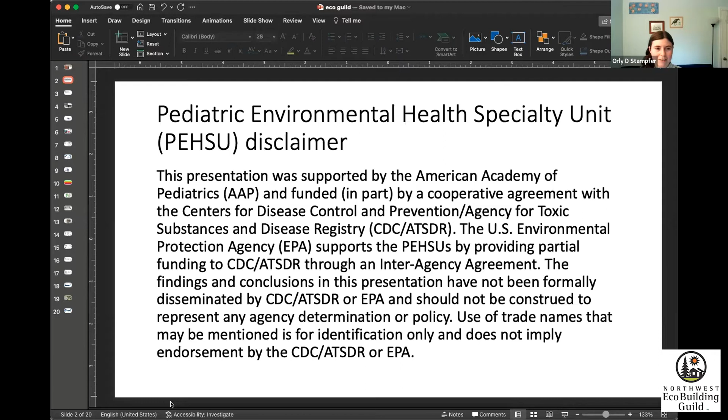And then at the end, I'll go into a couple of strategies for how to reduce exposure to wildfire smoke. Feel free to ask questions, clarifying questions throughout. And if I don't see a question, please feel free to just interrupt me too. That's fine.

Okay, so just start with this really broad overview of what is wildfire smoke. A lot of times we talk about it as if it's just this one thing, and as if wildfire smoke is all kind of the same. And it's actually really dynamic. So wildfire smoke is made up of particles, which themselves include liquids and solids, and then also gases. And it can change a lot as it travels over space, as the temperature changes and the wind changes, so the composition of the wildfire smoke changes a lot as it's traveling.

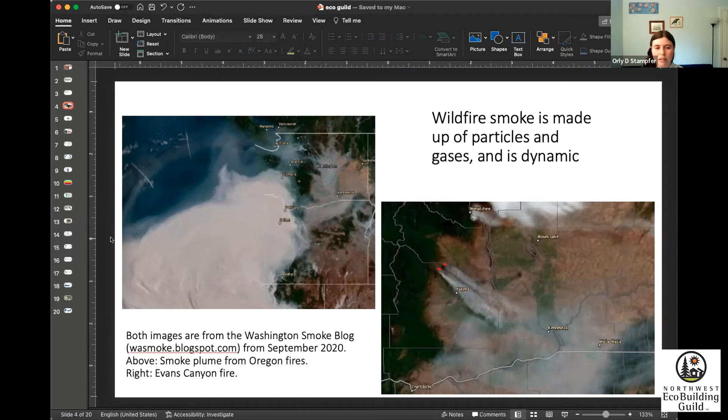So just to give you a sense that wildfire smoke is really dynamic and changes a lot, and that's part of what makes monitoring wildfire smoke challenging.

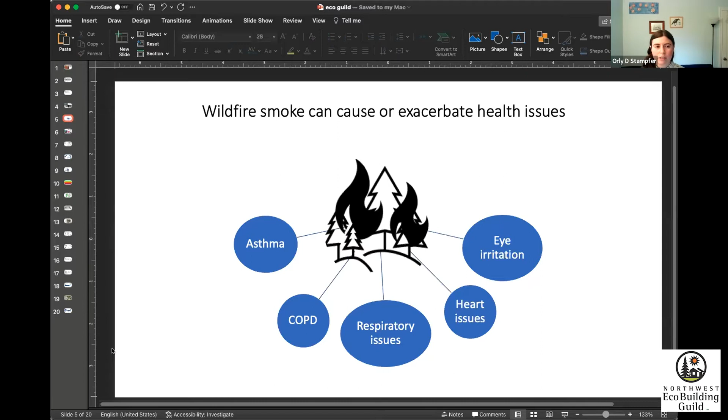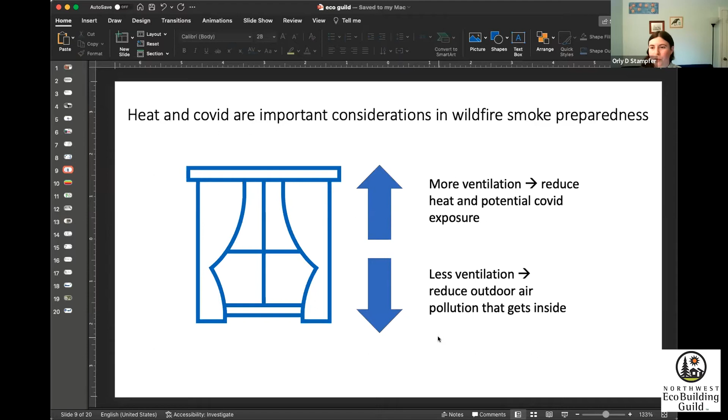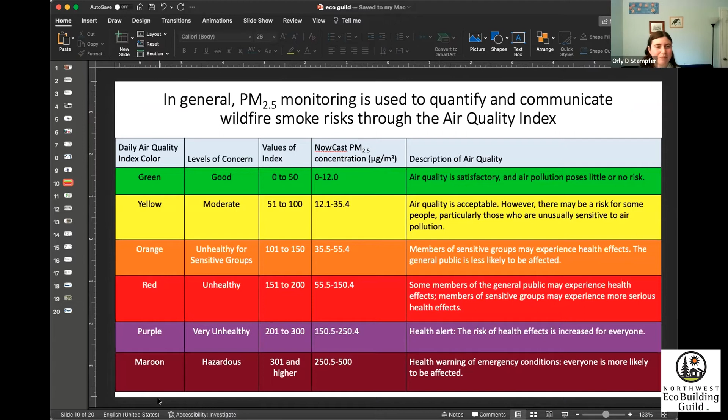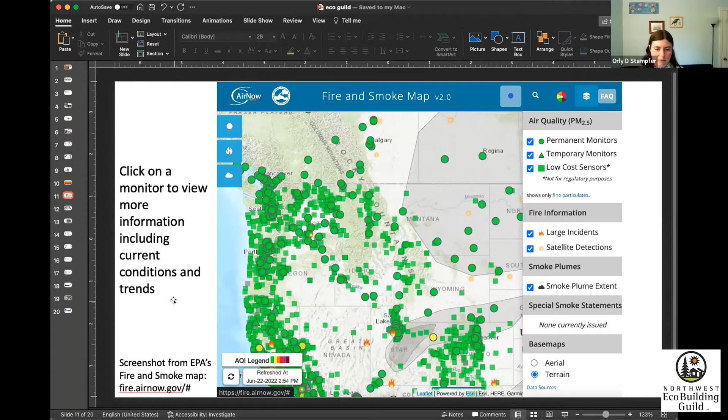And so they aren't sure about the credibility of the source. But this is actually really excellent information, compiled by state, county, federal agencies, and tribes as well. I know it's on Blogspot, and sometimes people are thrown off by that, but I think it's one of the best resources out there.

I look at the Washington Smoke blog regularly during wildfire smoke season, so I definitely recommend it. Oh, and I wanted to say too, each of these three smoke blogs already have that EPA fire and smoke map incorporated into the blog. So when you load these blogs, you'll already see the fire and smoke map right away, the same one I was showing you on the previous slide.

Okay, so all of that information I was just going through about how to look up your air quality, that's all referring to outdoor air quality. But like I was saying at the beginning, we also care a lot about indoor air quality. It's not necessarily a given that your indoor air quality will be good if you just go inside and close windows and doors. One thing I found is that your indoor air quality can actually vary a lot, even within the same building.

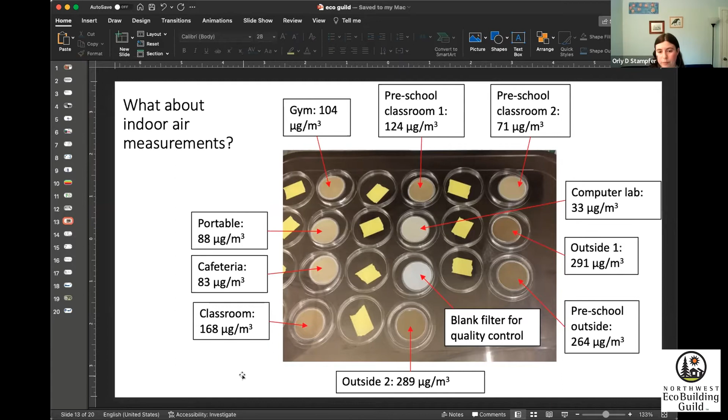So one way to take indoor air quality measurements is to use low-cost sensors. I wasn't going to talk about any specific brand in this presentation, but if you have questions about specific sensors, I will do my best to answer them if I've used that one.

My take-home message about low-cost sensors is that they can be useful to assess trends—to tell you if pollution is going up generally or down generally. And they can be useful to compare spaces to each other: is the air pollution in one room worse than in another room? Is air pollution indoors worse than outdoors, or vice versa?

But there are a lot of important considerations and limitations of low-cost sensors, so I'll just talk about a few here. One thing to think about if you're purchasing or using a low-cost sensor is how that data is going to be displayed.

Sometimes you can connect a sensor to the internet, or they'll have some kind of cloud-based service where you can view your air quality information that way. Other times it'll just have a little screen, where you walk around with a handheld sensor, and you're just reading the numbers off the screen in real time. Other times, you can download the data off of the sensor and create your own graphs and look at how the air pollution has changed over time.

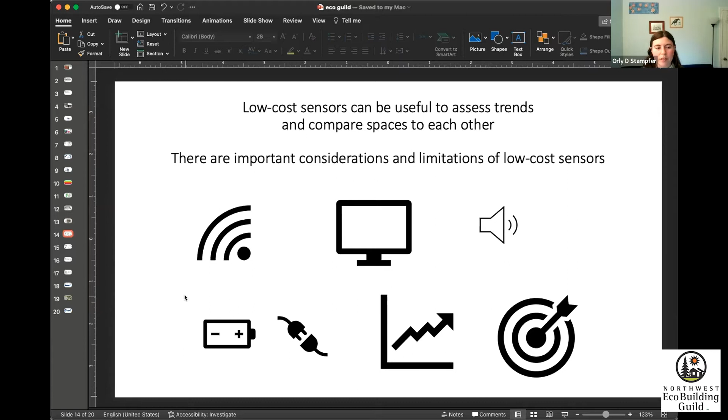So let's say now you have your low-cost sensor or multiple sensors, and you want to take some measurements to try and understand your indoor air quality better. These are some considerations to keep in mind.

When you're taking measurements, what you really care about is what people are being exposed to, what people are breathing in. So it's important to take measurements during regular use building conditions, because you want to capture what people are actually exposed to. For example, maybe you told everybody to keep the windows and doors closed, but they're still opening them. It'd still be really useful to find out what the air quality is like during that regular use condition, with folks opening windows and doors, because that reflects what they're actually breathing.

Also want to pay attention to the time. For example, if you're interested in a school, you might want to take measurements during pickup and drop off, because the front door is going to be open a lot during those times. And you also want to take measurements during the middle of the day that might represent the majority of the time that the school is in use.

It's also important to keep in mind what activities are going on in the space. Are people running around and kicking up a lot of dust, or is there cleaning going on that's impacting the indoor air quality, or is there cooking going on? You'll want to capture the range of conditions.

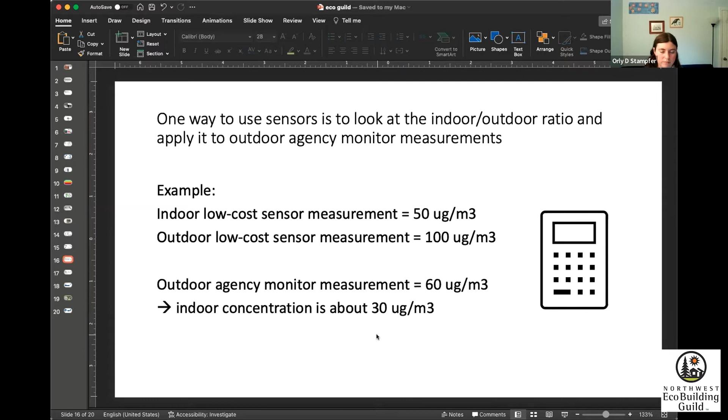Okay, so I also just wanted to go through not only how to look up your air quality and how to think about measuring indoor air quality with low-cost sensors, but also what can you actually do to maintain cleaner indoor air. So step one is to check the air quality so that you know when to take these actions.

Close the windows and doors. Turn off exhaust fans, because if it's a fan that exhausts to the outside, then while it's on, it's going to be drawing outdoor air into your home or facility.

If you have this option, set your ventilation system on recirculate, so it's not bringing in any outdoor air. This is also really useful in cars, to select the recirculate setting while you're driving. That can help reduce your exposure as well.

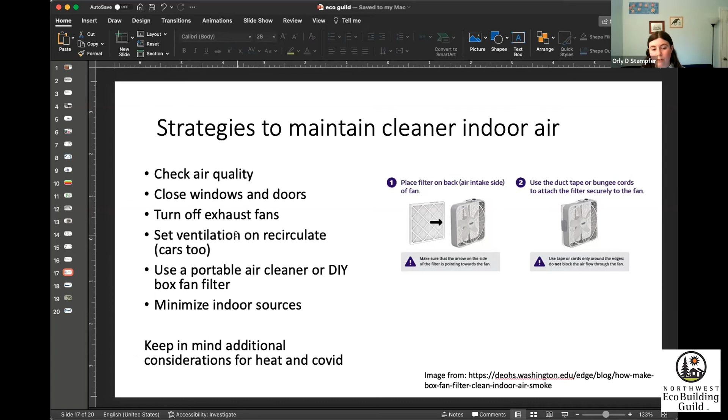I know I mentioned this already, but keep in mind additional considerations for heat and COVID, because that will impact how comfortable you feel having windows and doors closed, especially if you don't have air conditioning.

I did want to quickly mention a little bit more about portable air cleaners, and I think the next speaker is going to talk more about building level strategy. So this is obviously not a building level ventilation system strategy, it's just an individual supplemental strategy.

When you're looking up portable air cleaners, some things to pay attention to: if it has a CADR number, the clean air delivery rate, which gives you a sense of how much air that unit can filter per a certain amount of time. You'll also want to think about the size of the space where you're trying to filter air—if you got a small desktop air cleaner and you're trying to use that to filter an entire room, that's going to be really challenging.

Noise is a really important consideration. I've seen sometimes people have air cleaners, but then they don't use them because they're too noisy. Obviously it only helps if it's turned on, and if people aren't going to use it, then it's not going to help.

Some of them have an auto mode, so they actually have a sensor that's part of the air cleaner, and as the sensor detects higher concentrations of PM 2.5, it'll ramp up the fan speed and then ramp it back down automatically. That can be nice to have. A sleep setting is important to think about if you're going to put this in a bedroom, especially a feature of being able to turn off the display light.

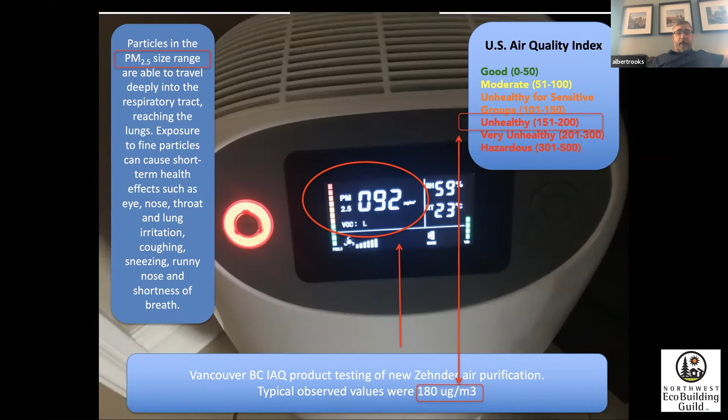This building didn't have a ventilation system, but we experienced it. My wife and I have had headaches and eye irritation and all of these things. We really couldn't find a way other than this device to get any relief from it, and it's really kind of an ongoing problem.

So not really telling anything new to anyone, but let's just take a step back. When we look at continuous ventilation in buildings right now, the newer buildings have some kind of well-performing ventilation device. We typically work with these Zehnder units, so that's my experience, and that's what I can really talk about.

A standard unit comes with an onboard MERV 13 filter. When we look up the literature for particle size, it's 1 to 0.3, which is a good size. This is now code in California. I think this might be code or approaching code in Washington State for commercial ventilation strategies, so this is pretty good.

I'm also interested in people's experience, so during this particular late summer I got a chance to talk to a number of customers that have systems installed. All of them generally would have a MERV 13 on the supply filter coming into the building. Some of them did just fine, reporting that their experience was fine—they safely made it through these large smoke events—while others said the MERV 13 filter wasn't good enough at all. They had a lot of smoke coming in, and it really irritated them and caused some problems.

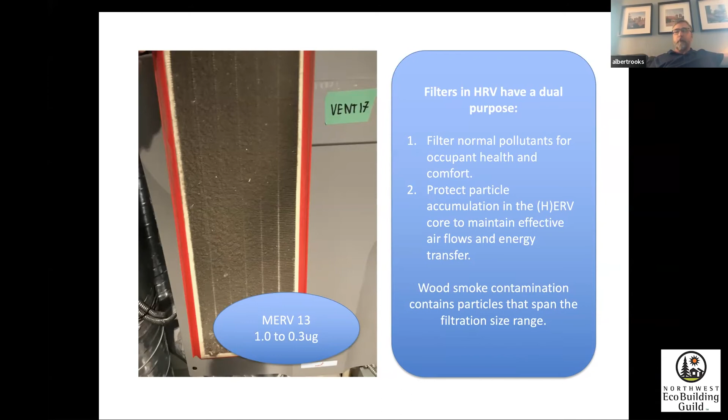My personal experience is I've had a lot of different filters to work with and systems to plug them into, and I can look at data because I have the ability to use low-cost sensors, and I can also just use my body to check my experience. Generally what I've found is the MERV 13 filters haven't really been enough for me, and generally for most people. When I've put in a MERV 15 filter, which is much finer—and we've got a MERV rate chart, I think, in the next slide—that's really helped.

It was really great of Orly to define that difference between a particle and a gas, because that black filter in the picture right behind is an activated carbon filter. In one of the smoke events it was really interesting—in 2018 in Washington, I think we had a week where we had some really fresh, new low smoke.

And so the sun was darkened because of the particles, but also kind of hanging low in the atmosphere at our breathing level was really a lot of gas, or it sure seemed like it was a gas. I did a small experiment putting an activated carbon filter in a building we'll see in a couple of slides, and that really, really helped a lot.

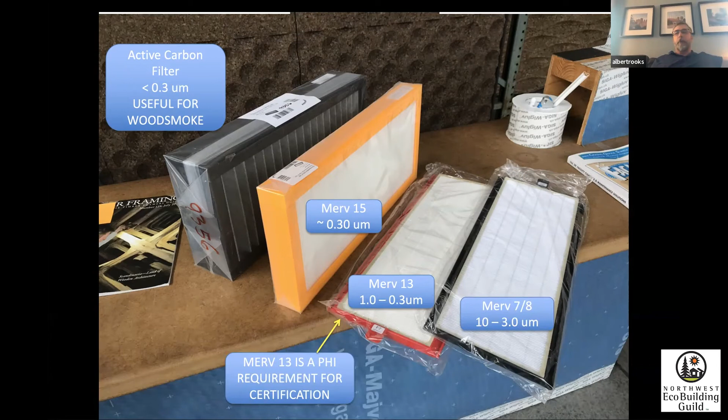Yet I think you can buy some activated carbon at Home Depot to make an adaptation of the Corsi box fan. So it might be worth knowing that, because at different times we're trying to filter out different particles or gases.

So here's a MERV filter efficiency guide, an ASHRAE guidance, and I find it a very imperfect document. It kind of gives us some room or some levels that the filtration is operating in. California code right now is MERV 13 on a supply intake. So we see this kind of 12 to 14 range, and it has a pretty good arrestance level. It talks about the type of filter it is and really what it's capturing, then heading down to 14 and 15 approaches HEPA.

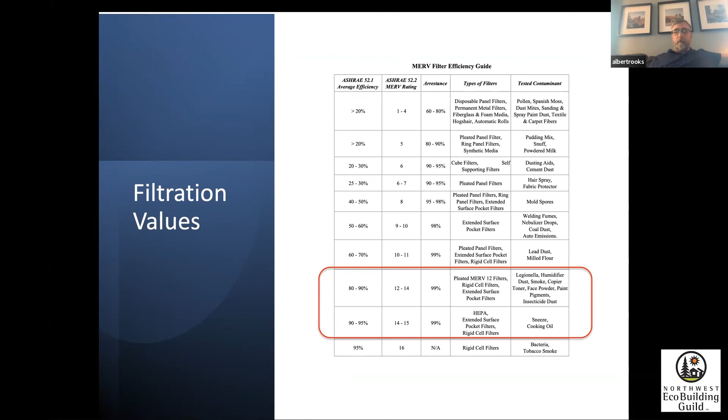It suggests HEPA looks like some pretty small particles, and maybe almost the gas at that level. As we head into 16, smokes and bacteria are kind of more gaseous than particles. So the thing I take away from this is, depending on the sensitivity and what we think the future is like, a finer filtration is better. And in some cases, MERV 13 is just a heck of a lot better than anything else.

Another experience I had, we did a retrofit on this house here. We put in a ventilation system, a continuous fresh air ventilation system. I'd say the continuous flow to this house, which is about 1,100 square feet over 2 floors, is about 70 cubic feet per minute, so steady. Ventilation rate, yeah, there it is down there, 0.32 air changes an hour. So that's a pretty steady rate, good values there.

The thing that happened with this house is it's in a collection of older homes in Olympia, and some of these really old homes had very old wood burning stoves. So winter would come, people get excited about burning their wood stoves around October, November, December. It seems like there's a lot of burning. We get an inversion, and all that wood smoke is kind of hanging out low to the ground.

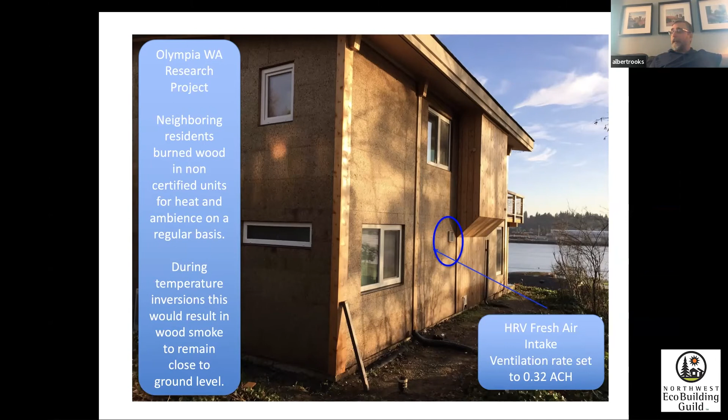And here we have this device that's pulling in air and running it through heat recovery with mild MERV 13 filtration. This wood smoke is really nasty, and it's got a lot of gas in it. So MERV 13 didn't really do anything for the gas as near as I could tell.

So we actually had to retrofit it and take that left-hand arrow apart, which is the supply flow, pick it up, turn it around, re-duct it, and add that steel box now on the right-hand side of the picture. That steel box, with the 2 screws in the upper corners at the lower where the tubes are connecting, is actually a door. You open that door and you can slide in an activated carbon filter or a MERV 14 filter.

We slid in an activated carbon filter and then ran the device at normal ventilation rates. The smoke cleared, the inside felt great. This particular structure has a really good air barrier - we retrofitted it down to 1.5 air changes. So there's really no other source of air coming into that building other than the ventilation device, and the filtration in this case worked well.

However, when we're working with activated carbon, the smell goes away and a lot of the irritation goes away. If there's any fine particles in there, I don't know that the activated carbon is really equipped to filter out those fine particles. So I can't really attest to how well I'm taking the particles out, but the irritation does go away.

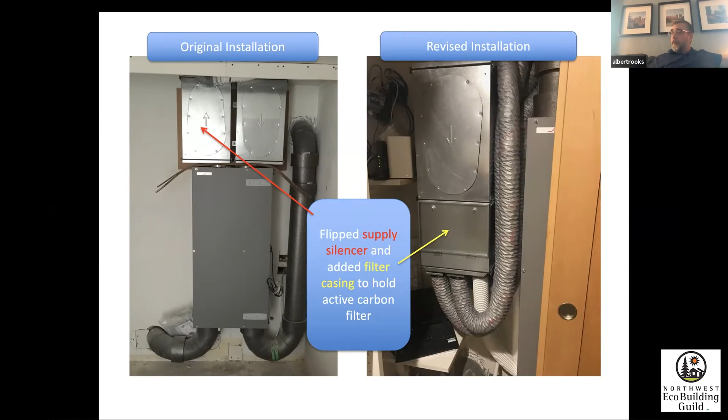This building here is one of our warehouses in Tumwater, Washington. I think this was 2018, and then also a little bit in our big blast of 2020. So from a building standpoint, what do you do when the outside air gets so bad and you're in a building that doesn't have a great air barrier? It's got roll-up doors, so a little bit of wind hits it and it'll push anything inside.

And we found a solution for this. During that week when things got pretty bad, it must have been 2018 because there was low dark smoke in the atmosphere, we had a ventilation system in it, and we quickly added a filter box on the supply flow with an activated carbon filter. While we didn't have any data monitoring at this point, we had one employee who absolutely had to go home by noon or 1 o'clock the day prior to us putting this equipment in.

They got irritated, their eyes were hurting, they had a headache, and I could agree with them. I wasn't hit quite as badly, but I could feel it. Everybody has a different level of sensitivity.

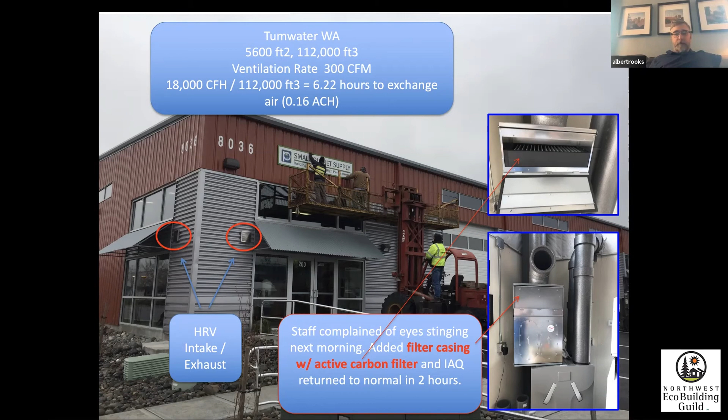So, reading my notes, it said 2 hours. Sounds about right, I generally work on the conservative side. That was the experience, and I thought it was valuable. It crossed a number of people, so it felt right to me.

We've got a multifamily building up in Vancouver with 80 living units in it, and we've been tracking the filter quality. Right before the big smoke event, we happened to replace all the filters in the building in early August. The smoke really hit mid to late August, and so we did an inspection after that, since we were scheduled to replace the filters.

You can see the condition of the filter on the left. These filters are really there for our own health, but they're also there for the equipment, because the heat exchanger core wants to remain clean, so the filter keeps that clean and functional. The schedule on this building is to change the filters once every 3 to 4 months, and you can see what these filters are picking up from the outdoor air supply.

Then on September 12th, 40 days later, we look at it and that filter doesn't look too bad. It doesn't photograph that well, but it's got a little bit of a dark hue to it when you look at it straight on. In this smoke event, it's not like we're picking up big particles like the ones on the left. The particles we're capturing in some of this filtration are really, really small, and they don't tend to build up in the same way.

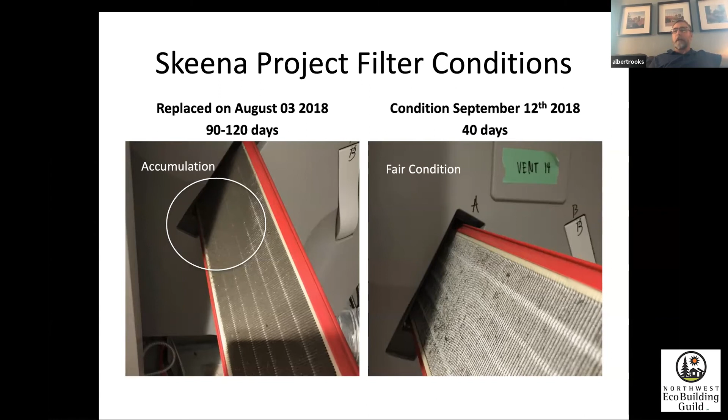So it's a bit challenging to understand how well this is doing, other than getting some actual data or reports from average users.

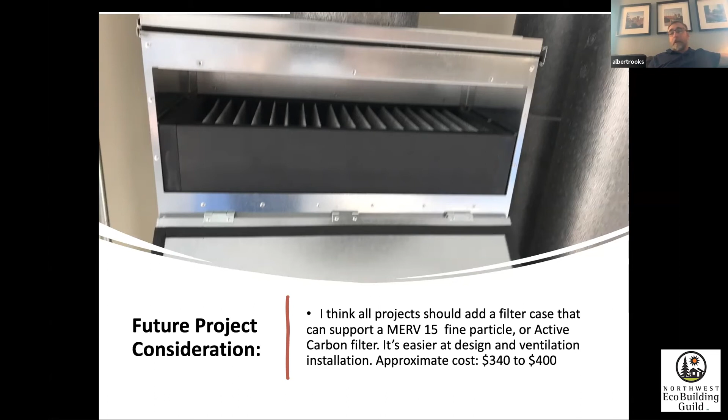So in this time period, I really came away feeling like in new building projects, we ought to have the ability to put in filtration, whether it's activated carbon or a MERV 15, something higher than a MERV 13 filter, because you never know which occupant is going to be affected by the filtration level at a MERV 13. Clearly some are.

It's got its own air handler and fan motor inside, so you can set it up to operate. HEPA generally has a higher static pressure as a filter than, say, a MERV 15 or 14. So you need a pretty big medium if you're going to run it through a ventilation device designed for a particular flow pattern and volume. The adaptation can be to take this device and put it into a forced air system, in which case you'd need the air handler to move the quantity of air that system would normally move.

If it's integrated with a Zehnder system, our recommendation is that you don't activate the air handler, you just use it as a passive device. The filter medium is large enough that it doesn't really increase static to the point where it's not valuable or usable. And it can be added after the fact.

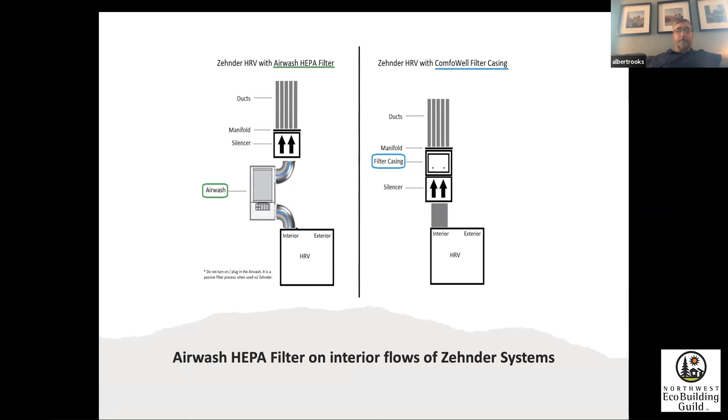So, some strategies there. Now we're going to talk about something else, which is new and different and really interesting.

I'm just going to check on time, so you'd be doing okay. I see one thing in the chat—okay, Jan, there you are. Good for capturing gases—yeah, I think we're probably in agreement with that. Great, okay, so I'll get that back. I want to go back to my earlier slide. Please let me go back—no, I don't want to go forward. There we go, thank you.

Okay, so here's a new unit. It's coming in September. It's a really interesting device—three slides, and then we're going to jump to a web page because the unit comes with a bunch of data which is really useful, so I can match that up with our experience. When we look at buildings right now, new construction, if they want to put in a fully ducted ventilation system, that's great—there's a budget, a design, and a demand for that. But what do we do with all our existing buildings? We found this unit near Amsterdam—it's made in Holland.

It won a Passive House Institute Germany component award also in 2018. It's really an interesting unit, and I'm bringing it back. We're introducing it, running it through its UL, and making a couple of adaptations to it. I'm pretty excited about it because retrofits are really, really tough, and this thing does a really good job at some key points if people find these useful.

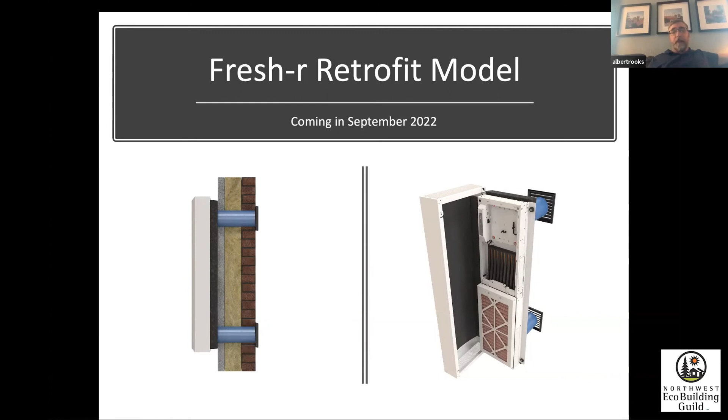This is a retrofit, so that big box kind of does hang off the wall. There is a flush mount model where that box can flush into the wall, and it's still 2 5-inch holes, 110 volt plug. New construction is flushed in the wall, so it can be fairly seamless.

MERV 14 filter upgrade. The data package is what we're going to look at here pretty soon, which is a new world. Right now, the filter medium is large for the flow, so the schedule to change the filters is annually, which in multifamily buildings is a big deal because the building manager's got to go into an occupied unit, and that can be a challenge. So if that reduces from 3 times a year to once a year, that's a big win.

There is a return ducting strategy possible, which means this can also replace a bath fan, because we can collect bath and kitchen exhaust, bring it back, and it can look at the humidity and decide whether it needs to go into boost or not.

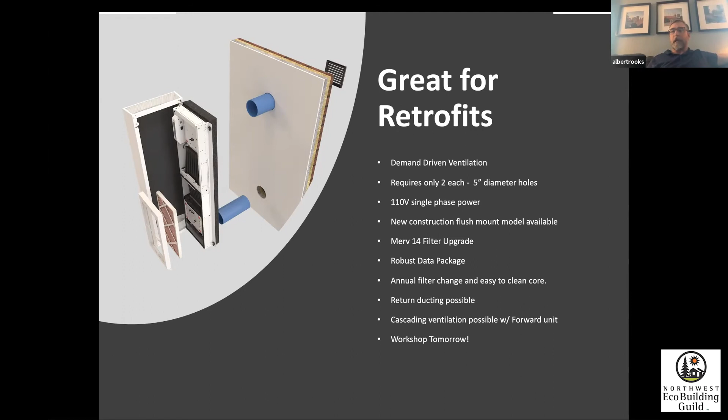These are just aside, because we're really talking about smoke and so forth today. Supply ventilation, creating cascade ventilation strategies, is possible with a forward unit, which I'll show a little picture of. It's timely because we actually have a full workshop on this tomorrow, and if anybody's interested, I could probably put a link in the chat so you could go deep and learn more about this.

So the forward in the cascading supply ventilation is, what if you had an existing building and you wanted to take the bath fans out, and you could run some ducting from the bath fans all the way back to the unit. But then you had a 1-bedroom apartment and you wanted to get fresh air supply flow into that 1 bedroom.

This is a unit that would go in the wall, totally self-supporting, that looks at CO2 levels in the bedroom, and rather than supplying into the bedroom, it pulls air out of the bedroom. So if we have one of the standard wall units placed in a living room or central room supplying fresh air, and it knows the quality of the fresh air, and this is depressurizing a bedroom, then essentially the fresh air supply is going to go through the door undercut of the bedroom as the bedroom depressurizes through this unit. And this unit will actually look at the CO2 that it's pulling out.

As there's more CO2, because people are in there sleeping, it'll run faster, and that'll cause more fresh air to come inside. And if there's more CO2 exhausting into the living room, then the unit in the living room is going to see that, and it'll increase its fan speed. So they kind of work together, still learning a little bit about them.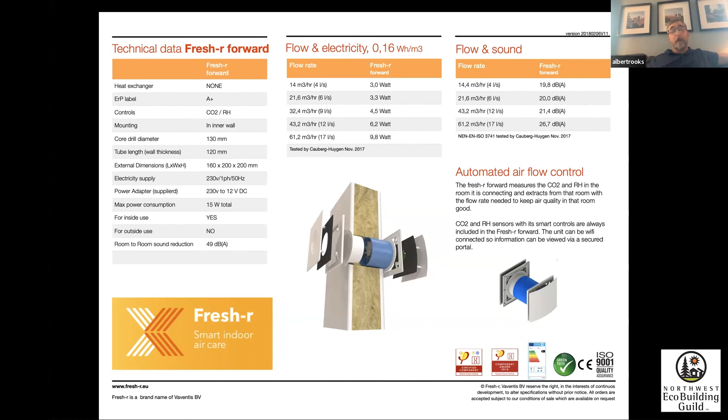With that, I think I'm going to stop sharing that screen, and I'm going to attempt to share another screen that I hope is kind of set up and ready to go. There it is. Look at that.

Okay, we successfully made it to a web page. So in this particular strategy, this FreshR has an onboard LTE stick. That means it's got a whole bunch of sensors in it, and it's got a communication module. So it's outputting data up to the cloud, and we're looking at it on our cloud interface.

If you're a single family home, this could be everything you're looking at. If you're a multifamily building, you could be looking at 50, 60, or 70 of these, all named for different living units and all with different level of access to gather different level of data - user level and then building manager level, who maybe can control more about the thing. But let's just look at this.

So right now it's just, we're going to say 513, this is CO2, ppm, 62% humidity. This is a live unit somewhere in Europe. I don't know where. So we're actually kind of spying on somebody right now, but we don't know who we're spying on. So I'm going to take it that that's okay.

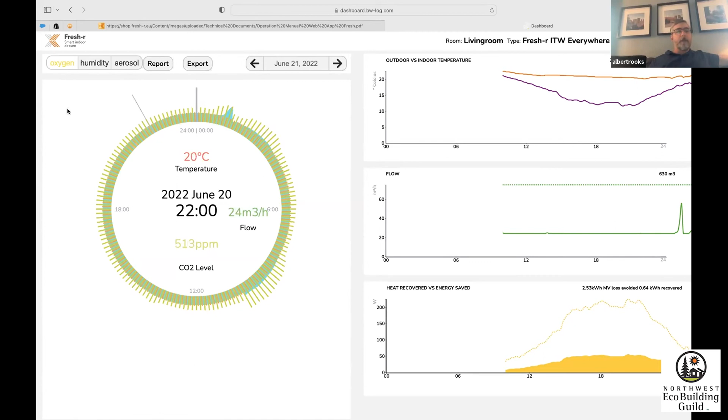And at the same time, I wish there was something going on in this unit. Not that much is going on. It does the same thing in humidity. So this is actual live data. Humidity is the outer band, the light blue numbers. Water vapor is expressed right here. And in my training, ideal conditions are right around 12 grams per cubic meter of water vapor. And we seem to - their climate is very much like ours. We seem to spend a lot of time right around there.

But also, if you consider that you've ducted the bath exhaust back to this unit, essentially what it's going to see is it's going to see the humidity pop up when someone showers. Then it can go into boost. We can do some special programming to say, okay, when we see this event happening and we go into boost, we can say, okay, go into boost until you see the humidity drop, but then stay in boost for another hour so we can dry out the shower stall and things like that.

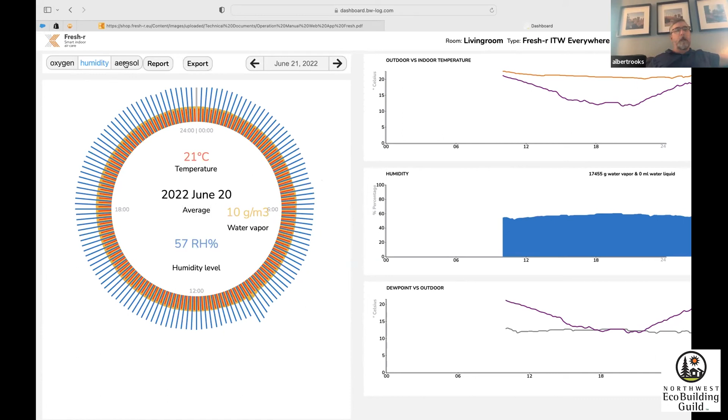We'll go back and I won't really look at energy today because it's not really the subject today.

But we can also look at aerosols, and we can look at them graphed in some very small numbers, right? PM 2.5, but also PM1. So something happened here because the building is sitting in the world somewhere.

I can look for a couple of days, essentially. What it's going to do is watch the fresh air coming in, what the particulate size is, and adjust our flow. It's also going to tell us what our supply is, but it also has a return port. So in a studio apartment, we're cooking in the studio.

We've cooked something and atomized some grease, or I've burnt a pizza or something, which is probably sadly common. It's going to see that return flow. And if this starts popping up, which is the other side of indoor air quality when the source is inside, it's going to increase flow and try to evacuate that out. Because it has onboard data, it can do a lot of interesting things.

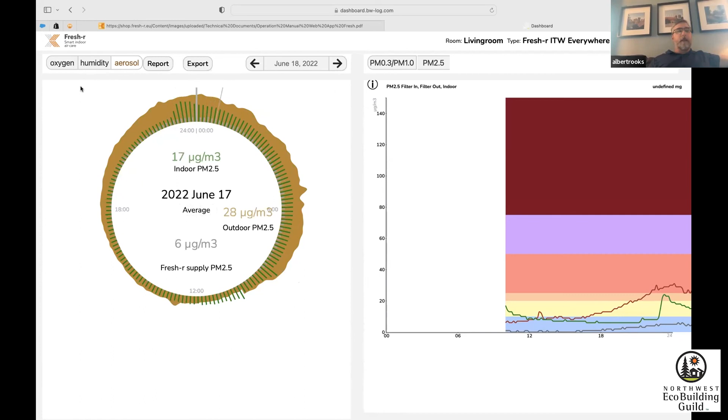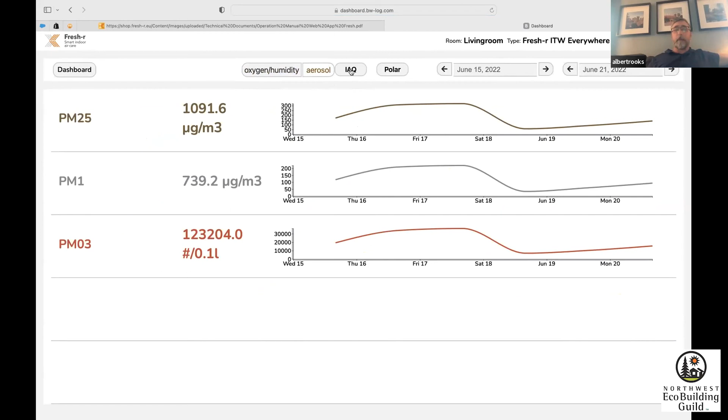As we get farther into it, for those interested in data, there's lots of fun data available in water, energy, all of that. But really for aerosol and IAQ, these data points are really pretty interesting. On a building manager or occupant level, especially when some utilities or organizations are investing in school health or something like that, this is the data they would find very interesting, accumulating over time.

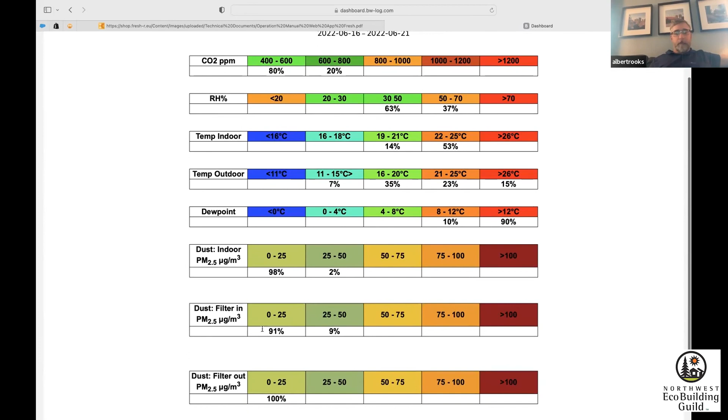We can set some date ranges, and it'll tell us how much time we spent in this 400 to 600 bucket or the 600 to 800 bucket. We can look at buckets on indoor air quality. We can look at filter effectiveness. We can look at how it affected flow, and that's a very, very low flow.

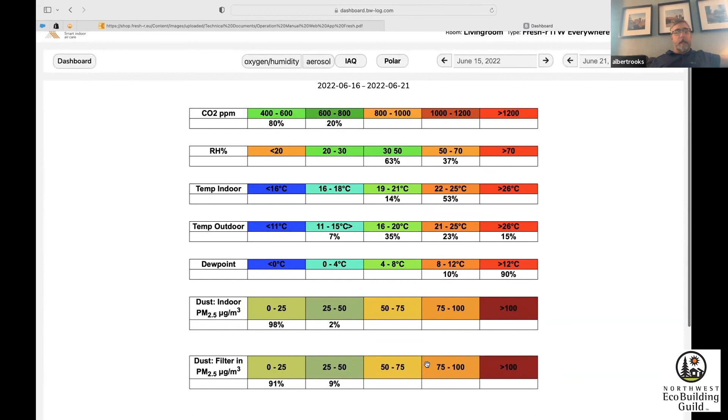And we get some really, really useful data.

How do you deal with the pressure difference between the intake fan and the exhaust fan caused by the added filter accumulation? So in all cases, this is the best way I know how to say it: it depends on the product and the application.

If it's a Zehnder product, you can add a MERV 14 or MERV 15 filter, an activated carbon filter, without changing any of the balancing. The pressure drops with filtration added are essentially inconsequential and won't move it outside of the 10% balancing range. That's just a function of how much flow there is across the static pressure of the filter medium.

So that's a simple answer. This unit is self-balancing. Newer Zehnder units are also self-balancing, the Q series. And if we're dealing with an air wash or something like that, it really takes somebody to measure it — somebody's got to come out with a flow meter, look at the supply, look at the intake.

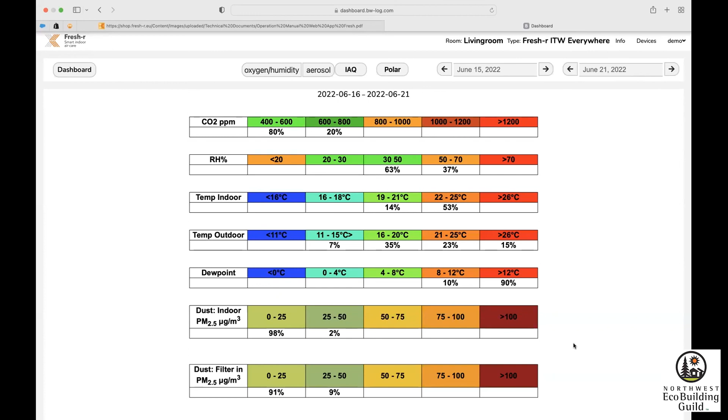I imagine a world where our weatherman says, well, we have a high chance of you needing a carbon filter today, and I suggest you switch up to your HEPA, your MERV 15 today, and keep watching your sensors and keep posted. Yeah, and hopefully we'll have another year where it just depends on where you are too and which way the wind's blowing, because the fires are certainly burning, and our experience is partly wind driven.

Thank you. Okay, thank you. So yeah, I'm there. There's that button. Now it's back. Thanks, Albert, that was really great. Awesome. Any more questions?